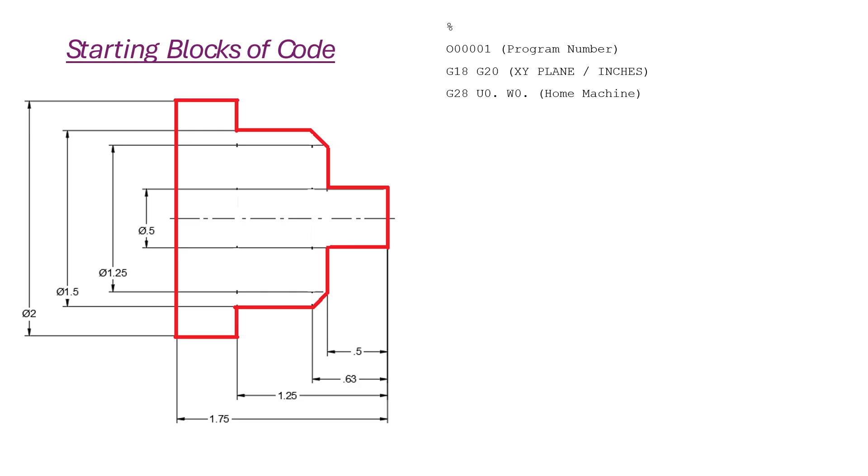So after that, we've homed the machine. Now it's in a safe spot to make a tool change. So we're going to call tool 1 with offset 1. So that's T101. And the 01 is very important. T1 is calling tool 1, and the 01 is offset 1.

Because you can do T213, which means tool 2 is offset 13. You do T501, tool 5 with offset 01. So be very careful. So this is tool 1, offset 01.

Now with lathe, we want to be in a constant surface footage mode, all right? And with that, we need to set a maximum spindle speed because as it starts to go towards X0, it's going to want to spin as fast as it can. So what we do is we set a maximum safe spindle speed, and that's using a G50. And for our Haas, we're going to be doing G50 S3000.

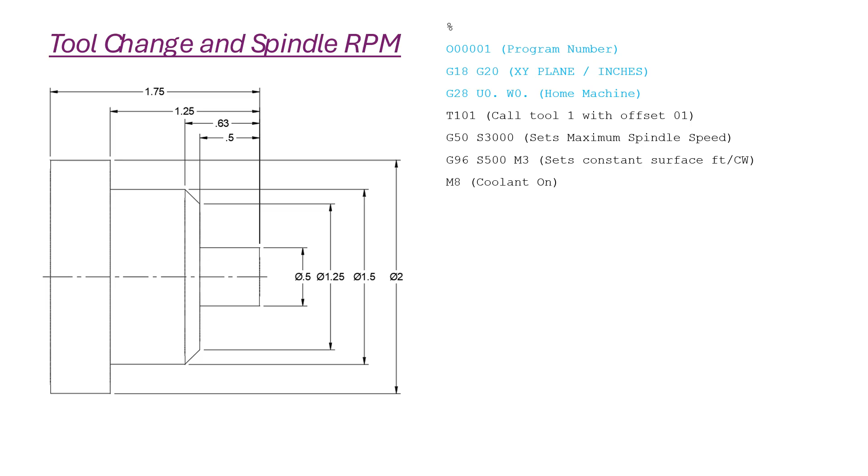The G96 puts it in that constant surface footage, and we want it to be at 500 constant surface footage, okay? And then we're putting on an M3 for clockwise rotation. Of course, after that, M8 for our coolant.

Now we're doing some movements, okay? So we're going to rapid it to a safe spot. This is always going to be your go-to location for when you are done with something or when you are going to something. You put in your safe location, all right? So we just changed the tool, turned on the spindle, turned on the coolant, and moved to our rapid position, all right?

Now we're going to go into a G01, which is a feed, to enable our tool nose radius comp, okay? That's our G42 for right hand tool nose radius comp. And you have to do that inside of a move, okay? So I like to give them a minimum of 100 thousandths every time I am putting in tool nose radius comp, okay? So from here, we're going from X2.1 to X2.0 and Z from 0.2 to 0.1.

And of course, for the G01, we have to put a feed, which is 20 thousandths in this. We're not cutting anything here. I'm just giving it a feed for movement.

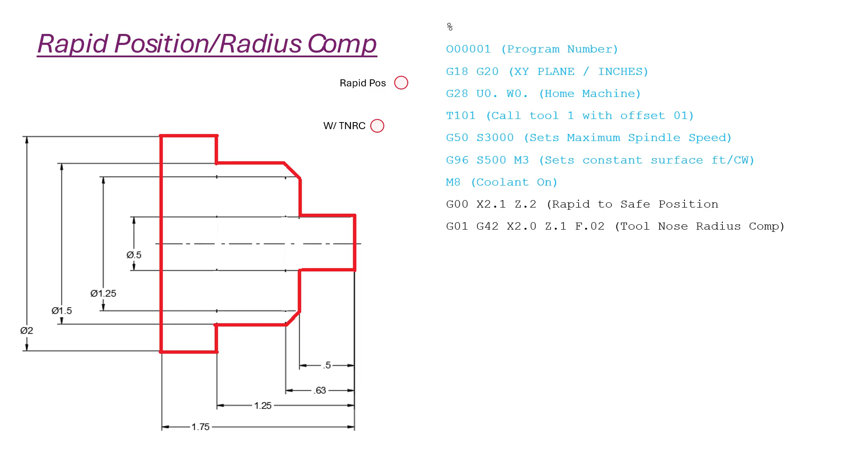Now we can set up the line for our roughing. That's our G71. G71 is going to calculate all the steps, all those depths of cut it needs to take, okay? So all we're going to put in here is some parameters. So we're going to say G71, because we want to do a roughing, OD, P100 and Q200. I'm saying start from here and end to here with P100, Q200. That'll make more sense when we start getting further.

U.01, I'm saying leave 10 thousandths on the diameter of this part for cleanup. And the W is for Z. So I'm saying leave 5 thousandths on the Z for cleanup. My depth of cut, 20 thousandths. So that means I'm going from this 2-inch part down to 0.5 at my smallest.

So it's going to take 20 thousandths cuts, as it'll do all that calculation for you. And we're going to do that at a feed rate of 15 thousandths inches per revolution. Okay, and that's going to be our roughing feed rate.

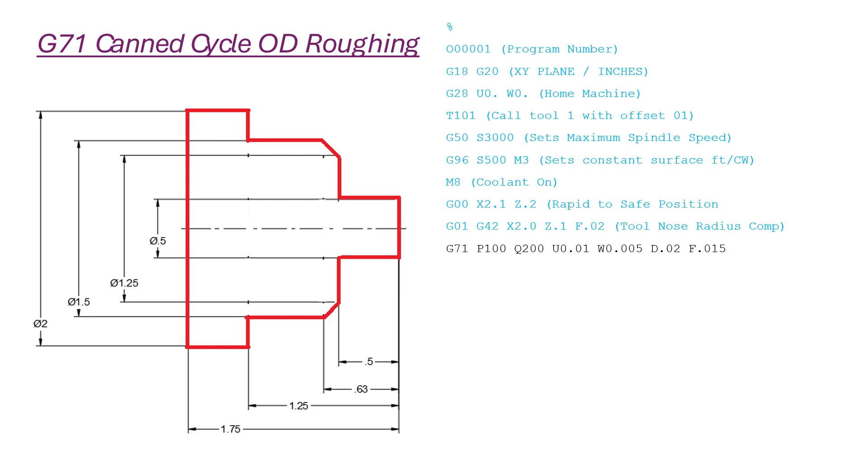So now we're into what was the P100 Q200, and we're going to notate that with the N100 N200. Okay, so don't get confused here. So N100 is the start of the G71, and N200 is the end. And within those is where you put all of your points. Okay, so

my first point, I'm not facing in this, so I'm just going to start right at what that outside diameter is for that smallest point. I'm going to X 0.5, Z 0.1. I don't need to go to 0 from here because I'm going to take a full OD cut. If I was doing some facing, then I would need to go to 0 and bring X up. I'm not doing that here. This is more simple. Okay.

So X 0.5, Z 0.1 with a feed rate of 0.005. Now, it's not going to do that here. That feed rate that you put right there is your finishing G70 feed rate. So make sure you're keeping an eye on that because you want that to be a lot slower so that your part comes out a lot shinier, nicer. Okay. So that is going to be your G70 feed rate.

So point 2, we're still going to be in a G01, Z negative 0.5. Okay, so very simple, only a Z movement. And then we go to a X 1.25 for point 3. Okay, now to point 4, we need to make an angle cut, okay? And it's given us the dimension of X 1.5 and Z negative 0.63. Okay, so when you put both your X and Z in the same line, it's going to make an angle.

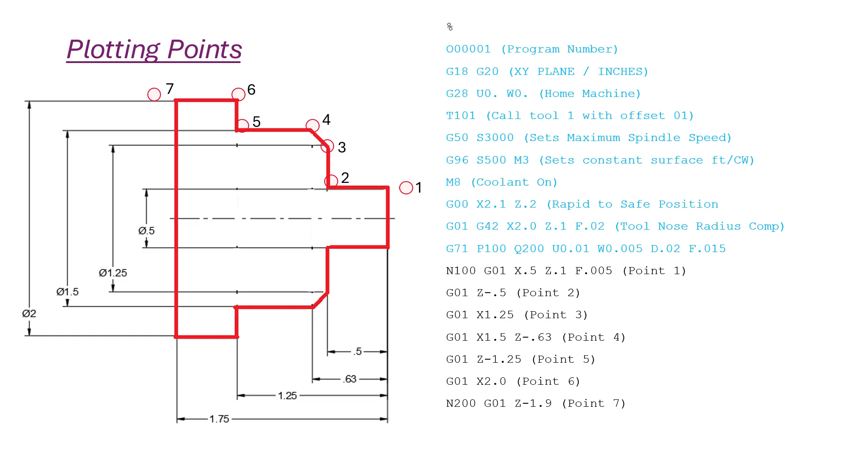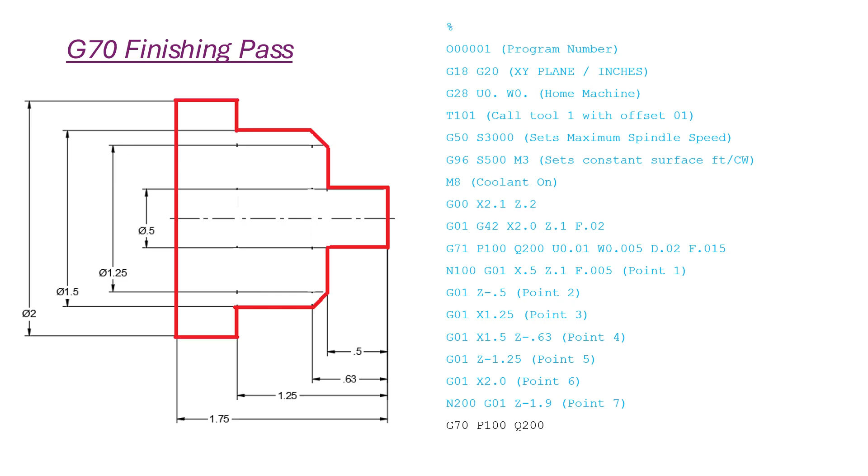So our G70, we just did all of our roughing. Right after our N200, we can just put G70 with our P100 Q200 code, okay? That's going to execute the finishing pass right then. And then you just close out your program.